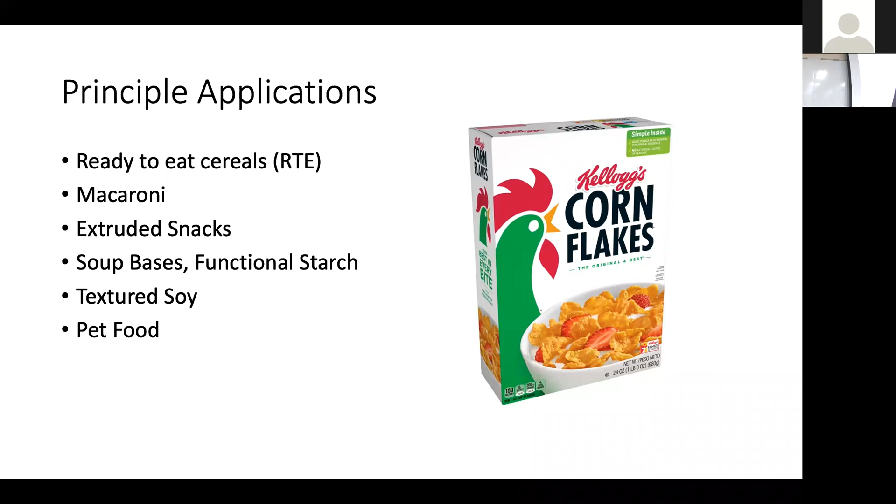So for ready-to-eat cereal products, you see your Rice Krispies, your Cheerio-type products, your cornflakes, your honeycombs - everything. Donut shaped ones with cinnamon and whatnot, shapes like X's, cereals like Lucky Charms where you have different shapes, just ball shaped ones, to flakes. So all of them are quite a bit of products that are in the marketplace.

Rehydratable noodles that include all kinds of shapes. Minute rice, that's also extruded. Was that not Orzo? Orzo too - Orzo or minute rice, I'm just talking about the rice lookalike, but it is cooked rice. That's why with minute rice, basically you add hot water and you have rice, right? For cooking rice normally, you cook it for 20 minutes - you soak it in water, and if you're going to pressure cook it, maybe 15 minutes. But this minute rice, you just pour hot water and you have the rice. So it's already extruded, shaped like a rice grain.

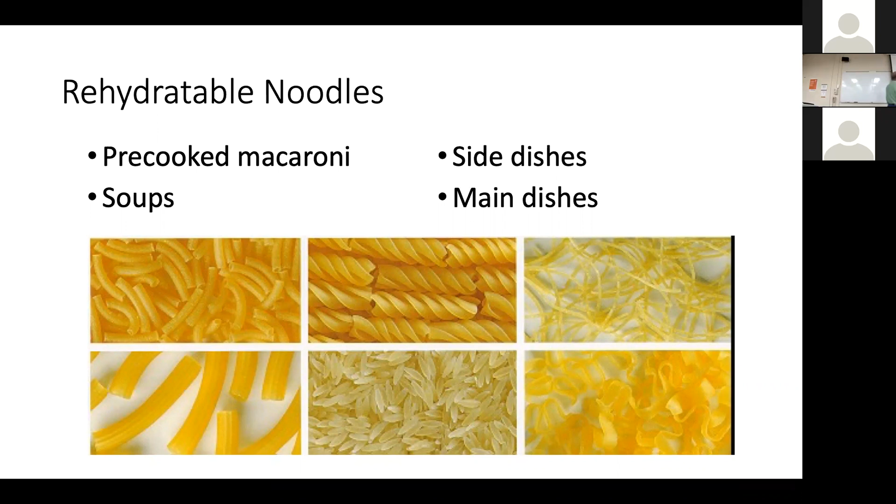These are all egg noodles, egg kind of proteiny and tortellini products, and you name it - all of those products.

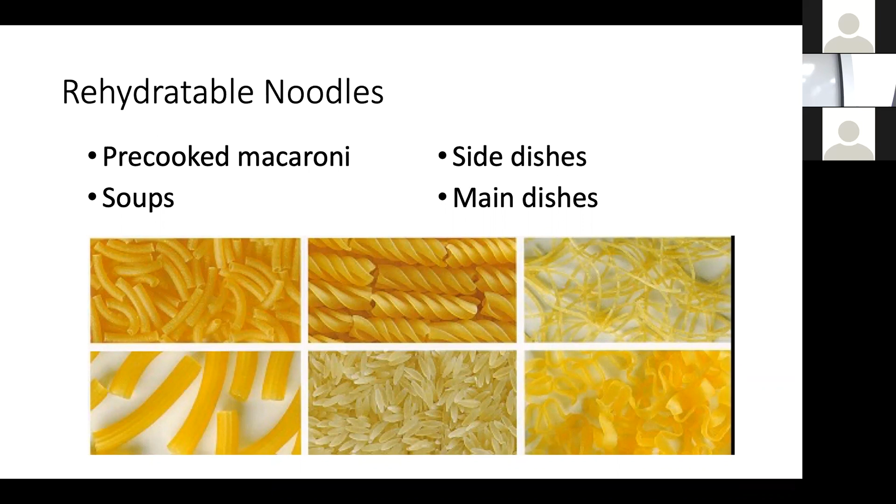And then extruded snacks - your Cheetos, puffed cheese products, or puffed potato products, onion ring type of products, you name it, cheese balls. So a whole range of extruded snacks.

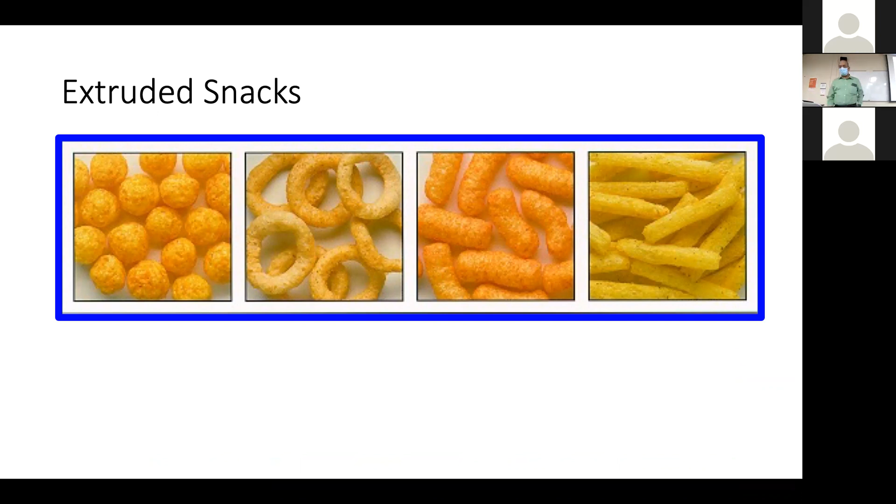Texturization, both starch and also protein. So restructuring starch can happen with texturizing under extrusion. Restructuring meat muscle - if you get some of the meat products that's no good to sell in the marketplace, but they are still really high protein, you can take them and create a restructured steak, a restructured lookalike of the other high value product. We can do that.

Restructuring vegetable proteins - we have a plant protein innovation center in our department. That's pretty much it, it all started a long time back. It's not new technology, but there is a renewed interest in plant protein based products now. I can tell you I worked on plant protein based product development back in 1994, which is like 25 years back. And I was not the first one to work on it, so somebody was even working before me, that's what I'm trying to tell you. So it's not really a new technology, but the technology gained momentum recently with Beyond Burger and Impossible Burger and those sorts of things. But the information has been there for a long time.

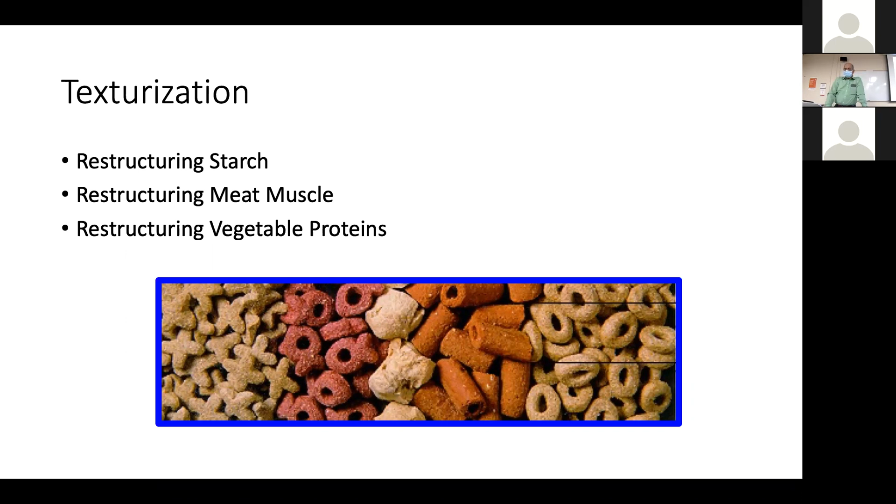Snack pellets - this is also there, again mostly different shapes that you can look at.

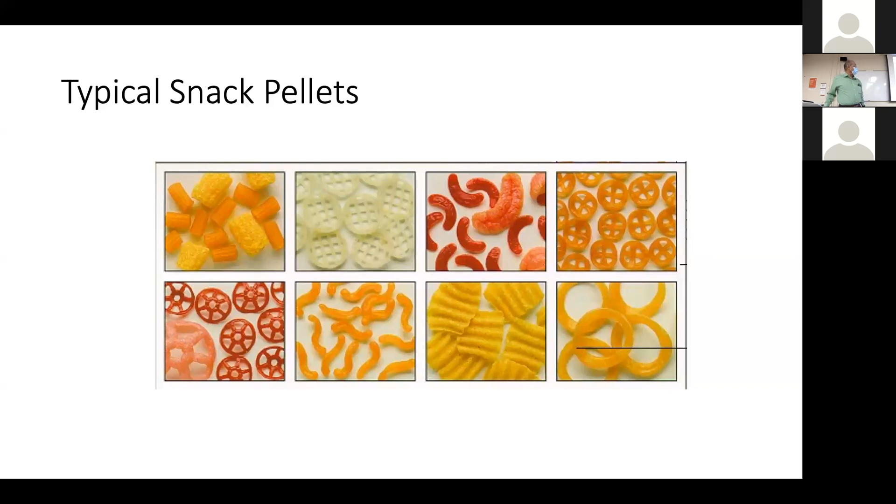Filled snacks. I used to teach back in Virginia, and when I asked how many of you guys eat Hot Pockets or Croissant Pockets, pretty much all graduate or undergraduate students say yes, because that's our staple food to live on, in a way. So those are all extruded.

Your cheese sticks are also extruded, using what's called a co-extrusion process, which means both materials come up in two different extruder barrels, and then they are put together at one point as they come out.

I've been to a processing facility where they make onion rings for Burger King. If you're cutting real onions, no two rings would be the same shape - there's an inner ring and an outer ring, different sizes. But Burger King onion rings are all exactly the same size and shape. How could that be? We don't question that, right? It's actually extruded - it's a formed product.

So you have an onion goo that's pumped through the center, and your breading batter comes on top, forming the product. It's a co-extruded product. Then it goes through a fryer for partial frying, then through freezing, and then to the marketplace, where the Burger King store refries it and gives it to you. So co-extrusion is another possibility.

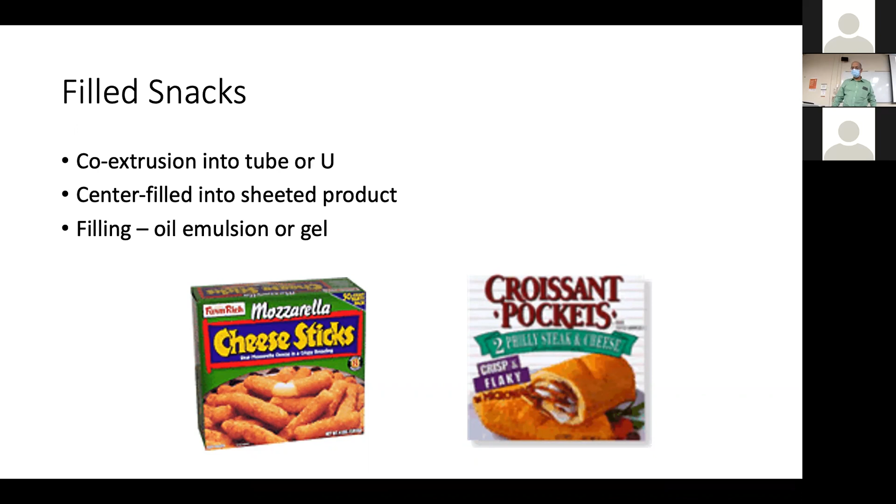Pet foods - this is the major market for extruded products, and you'll know why. All the pellets for pet foods and animal food.

How many of you have been to an African safari, where you see live animals outside and you're inside a cage instead of the animals? Have you been anywhere like that? No, that's sad. But there are a lot of places in the US where they take you in a cart, where you're inside the cart and animals roam freely around - places where animals can interact with humans.

They give you food to feed the animals, and most of these foods are extruded pellets. You can keep it in your hand and they'll take it out of your hand, and kids really love them. They'll charge you like $5 for a bucket, or maybe $15 for a bigger one, and you're willing to pay that, but the actual cost of the material is like 10 cents.

Basically all trash goes in, comes out as a nice pellet for the animals to eat, and the animals are well tamed to eat this. They always look for handouts from folks coming to see them - they'll come to you, like giraffes, zebras, you name it. Those animals are tamed to some extent, so they interact.

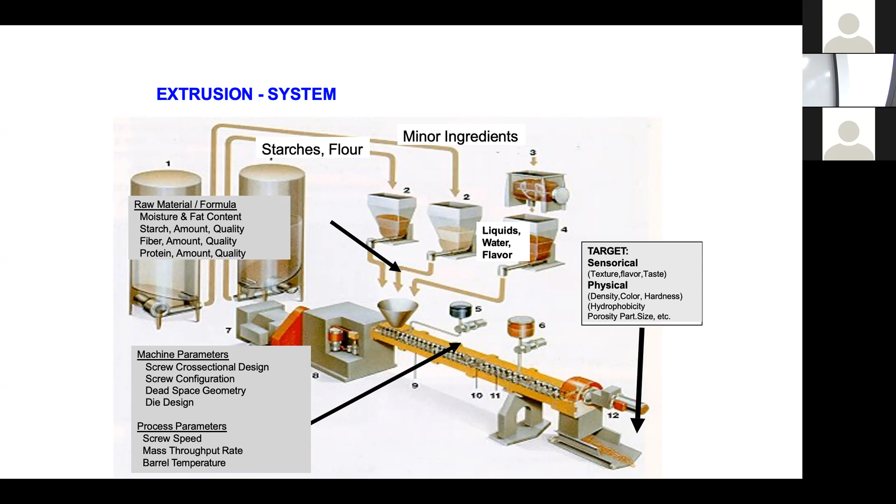So the types of extruders are single screw barrel or twin screw. Single screw is cheaper and mostly used for pet food kind of thing or feed grade extruders. Sometimes they also go into plastic manufacturing and chemical manufacturing technologies.

A decent single screw extruder could be about $20,000 to $50,000, something like that. But a twin screw extruder, a small one, maybe half the table size, the whole extruder part, like 5 foot maybe, a 19 millimeter diameter screw, is about $500,000.

I wanted to get one when I was in Virginia in 98, 99. That time it was $500,000, so it could be more than that now. I want to get an APV Baker 19 millimeter screw. It's almost like a toy for the industry, like a pilot plant scale, and that's $500,000. Pretty expensive.

When you go to industry like General Mills or Post, they will have like a 50 millimeter diameter, and then the screw would be from here to the end of the room, kind of. The whole extruder would be huge, and look at the price of that, because it's a unique process making those stainless steel screws. You've got to machine it very perfectly. The barrel has to be properly shaped and made. The machining is a very expensive process.

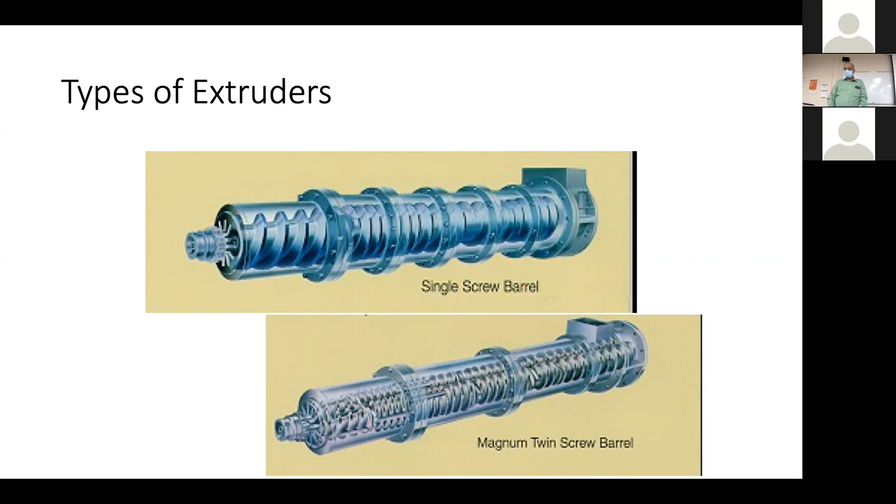Twin screw extrusion is very advantageous compared to single screw. That's why twin screw is very popular in the food industry, especially for human food kind of thing. It provides efficient conveying, and you can add a variety of ingredients.

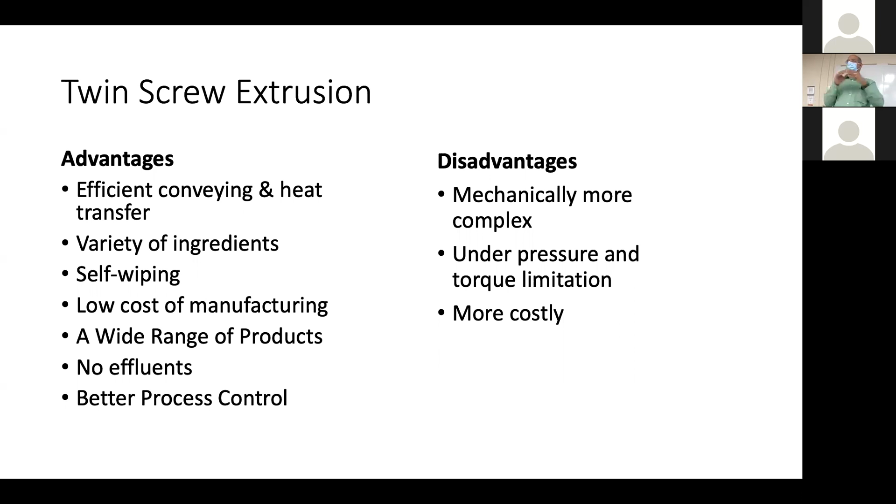It's called self-wiping, which means when I have 2 screws going in, one wipes over the other. So when you look at it, as the screws rotate, this screw will wipe this one and this screw will wipe this one. So you don't need to worry about anything clogging, any dead material in there. So there's no effluent in a sense, meaning whatever you put in will definitely come out. No wastage.

And there's a wide range of products possible. The manufacturing cost is minimal. Even though the capital cost of the machine is so expensive, once you start running the machine, the actual manufacturing cost is so cheap. So it pays off in the long run.

The problem with twin screw extrusion, even today, is that the extrusion technology is 50, 60 years old, maybe even more, and it's still not well understood. So you need real experts to make some of these design changes, which means if you are an extruder expert, you will make money like anything. You can rake in the money, you will be rich. And I know that there are only 10 or so extruder experts in the world.

And at least I know a couple of them, both in Minnesota. I'm just saying this is a complex machine, mechanically very complex. We will see more about it as we talk more down the line.

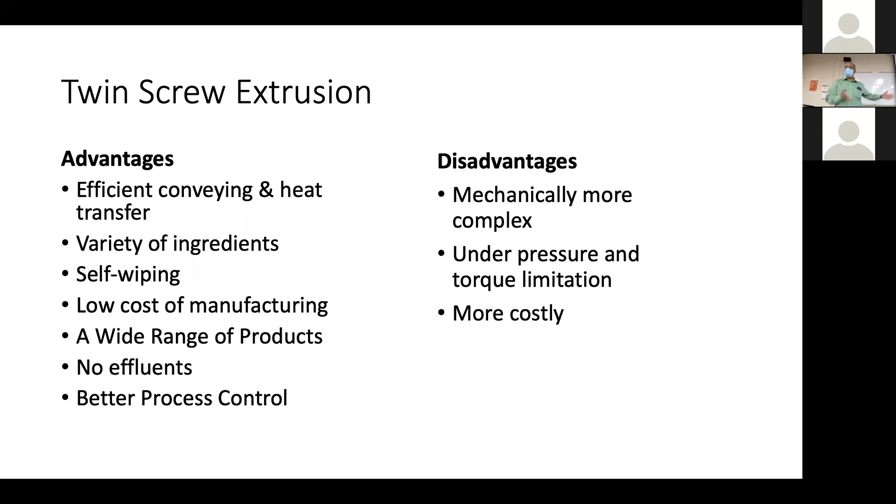The twin screw extruder, compared to single screw, has a limitation for pressure and torque, so you cannot run infinite torque or infinite pressure levels. A single screw can take a little more torque, you can put a bigger, more powerful motor to churn the thing. But its capital cost is very expensive. You already know, a small one, a toy, is $500,000 if you want to play.

So the definition for extrude is this: shaping of a material by forcing softened, plasticized material through a die by pressure. Simple. I'm going to create a shape of a desired form by forcing soft plasticized material through a die. That is what extrude means.

So the extruder could be something simple, what we call a forming extruder or cold extrusion. You're not heating it at all. You basically force the material through a die to create shapes. It's not a grinder, it doesn't grind at all, you just send the material through. We have extruders for making Indian snacks, like a handheld one where you put the dough, give pressure, and it comes through the hole to make shapes. That's a cold extruder, that's extrusion.

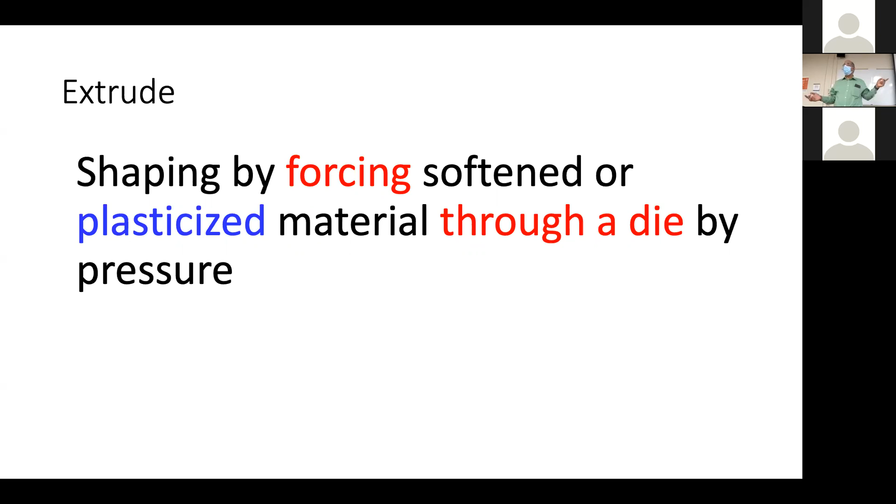Extrusion is when you get a soft plasticized material, then force it through a hole or die to create a shape. But in a cooking extruder, in addition to that, you are also cooking. The cooking extruder is the more advanced one.

The cooking process for extrusion is completely different. In addition to forming the material, in extrusion the water content is mostly not more than 25%, 10 to 25%, so you put the raw material as a paste. Compared to conventional cooking, it's almost 70 to 95% water.

The temperature with extruder will reach almost 200 degrees Celsius, just like that. Compared to conventional cooking, which takes a long time but doesn't go more than 120, that's your steam temperature. Unless you consider frying, you go for 170.

In extrusion, the actual cooking process is less than a minute, compared to traditional cooking which takes more than 30 minutes. So it's high temperature, short time—actually ultra high temperature, ultra short time, less than a minute.

Because of that, it doesn't have any of the side effects, and it has improved flavor, improved nutrition, and all that.

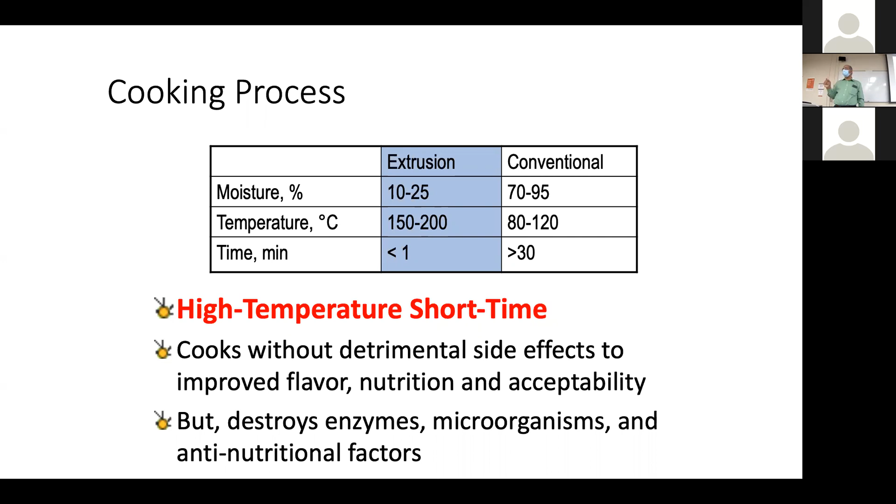And because of the heat, it can destroy enzymes, it can destroy microorganisms. It can also target anti-nutritional factors that are present, like toxins, in the food.

When we look at the extrusion process, we have a preconditioner. We already showed you the minor ingredients kind of things, moisturizing. You can add heat with steam. You mostly mix with low shear, trying to get a uniform material to go through your extruder.

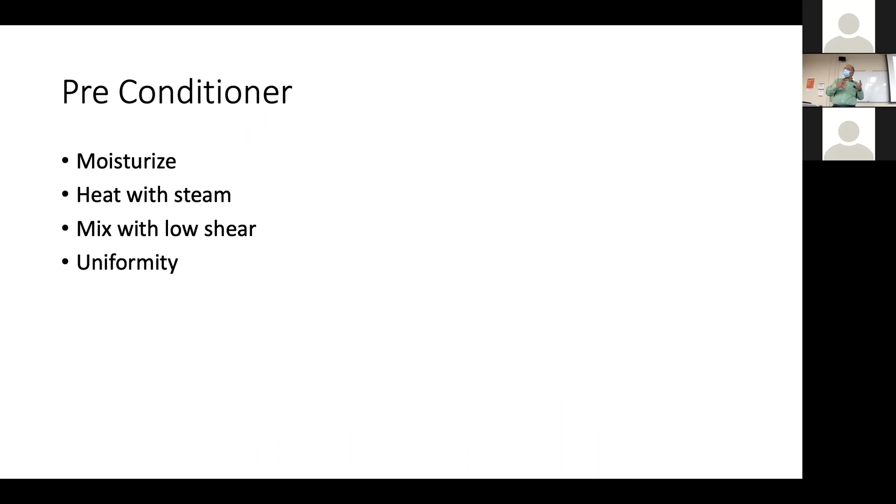Then you have the screw, the major part of your extruder, where heat is generated by viscous dissipation. That's the fundamental principle for the extruder—viscous dissipation. You can also do heat transfer, remember we talked about barrel heating or barrel cooling, and steam injection. You can add steam along the line; they inject steam inside the barrel, then vent the steam. You can add flavors into the extruder. At the end of the screw, you have the restriction—that's your die.

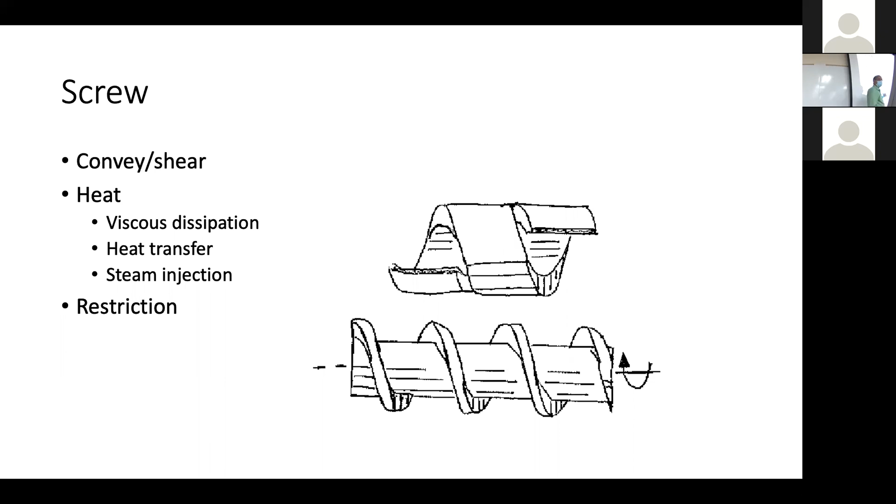So in a single screw extruder, when you look at it, this portion—the pitch is open, and the gap between the screw and the barrel is also open-ended. This is called the feeding zone. In the feeding zone, most of the time it will be a starved screw, meaning it will not be completely filled. You can keep adding more.

But as that goes to the kneading zone, you can automatically see the pitch has reduced, and the gap between the barrel wall and the screw is also narrower. So you start to see kneading—kneading is almost like massaging.

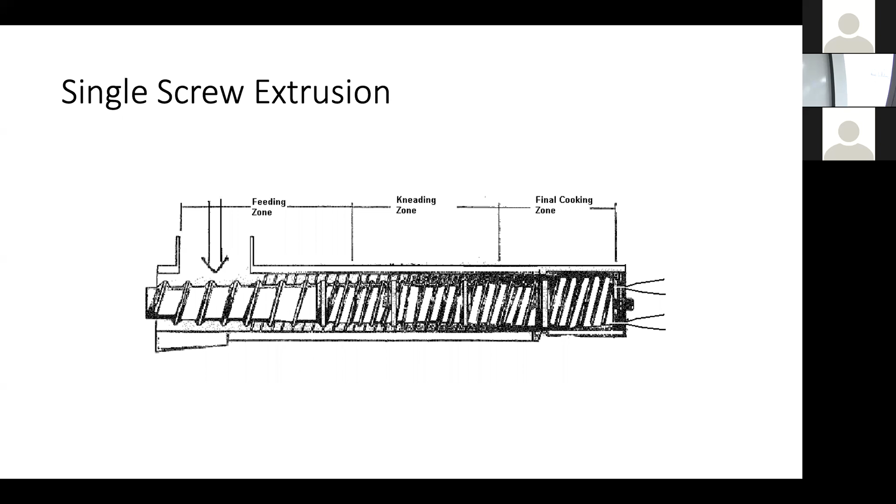Then this is the final cooking zone, where the pitch narrows even more, and the gap is practically nothing, very minimal. So in that case, the material gets cooked. If you talk about a single barrel, single screw extruder, the cooking happens only here. So how much residence time is the product going to have in this portion? Less than a minute, like a few seconds if you want to put it that way. The actual cooking process happens there.

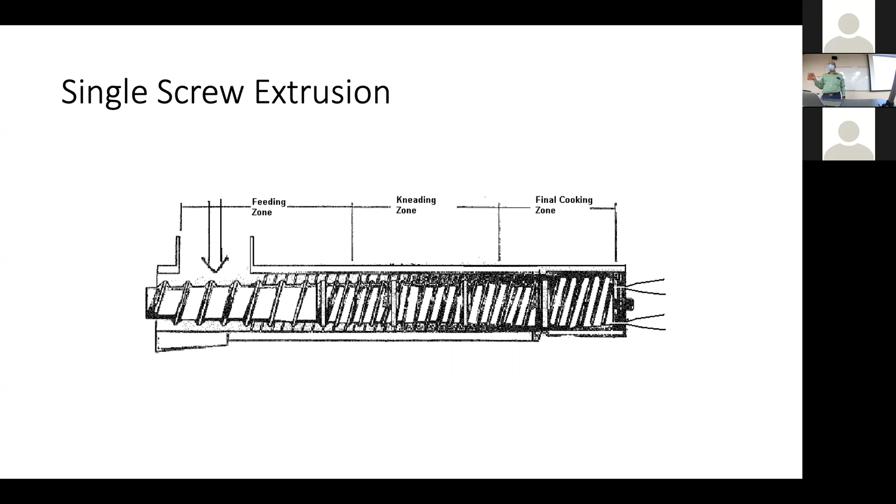So flow in the screw, this is a fundamental: laminar flow. Please remember that. Laminar flow means there is no turbulence. Flow caused due to shear.

The flow happens because the screw is moving, and then particles move in parallel paths. So they don't mix. No radial mixing. It's like going in a highway, everybody going in their own lane. You keep your speed, don't change your lane. The faster lane guy doesn't come to the slower lane, and the slower lane guy doesn't speed up to the faster lane. None of that happens. Everybody stays in their lane going at their own speed.

It's like German highways, right? Zoom, zoom, zoom, keep going. You go in your lane, at your speed. So the fastest lane, even within the multiple lanes, is the inner lane, right? The cars there go really fast. The lane close to the exit, they go slow. So that's what you have. That's the laminar profile, right?

So the laminar profile will look like this. This is the fast lane, guys, and this is the slow one, close to the exit. Something like that. So this is laminar flow, no radial mixing.

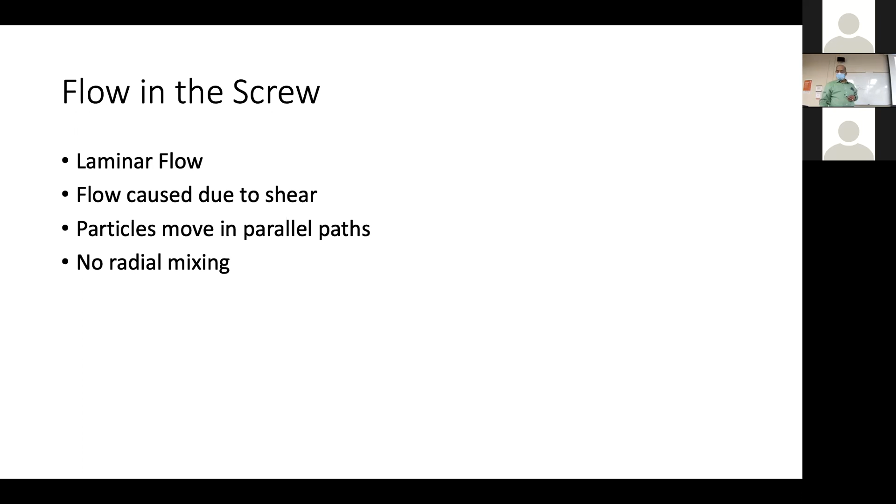The effects of shear: if I increase the shear, that means I increase the mechanical damage in the food, and that will reduce particle size. It's like grinding. When the material is going faster than the other one, they rub against each other, and they break things down. So you get a reduced particle size by increasing the shear.

You also get increased solubility, because the broken down material will be ready to dissolve rather than lump. And then softer texture and orientation happens. That's the beauty of an extruder: if I'm feeding in proteins, and the proteins can bind to themselves, I can really create the striations that you see in meat. So that's why you can create fake meat with an extruder when using plant protein.

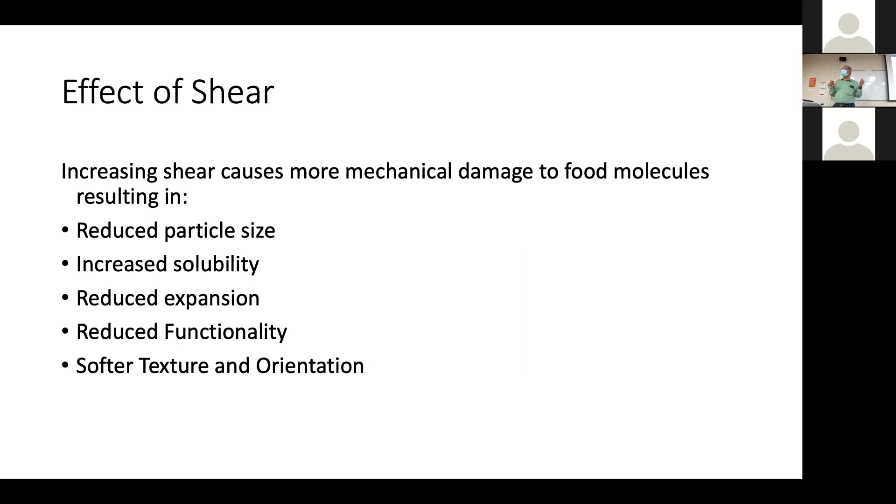So shear is a good thing for me. How do I increase the shear? Either I reduce the moisture content of my material, go for low moisture, so the material isn't ready to flow and I create that kind of friction. Or use a higher screw speed, run the screw faster. There's a limit, I cannot do it infinitely, but increasing the screw speed increases shear and increases the work.

Increase the compression ratio. Compression ratio means the diameter of the feed screw compared to the diameter of the cook portion. You remember in a single screw we talked about something like this, this is a screw, it will be the same with a bigger pitch. This is the screw. Get the idea, right? So this is the diameter, and this is the other diameter. So the compression ratio is D feed over D cook.

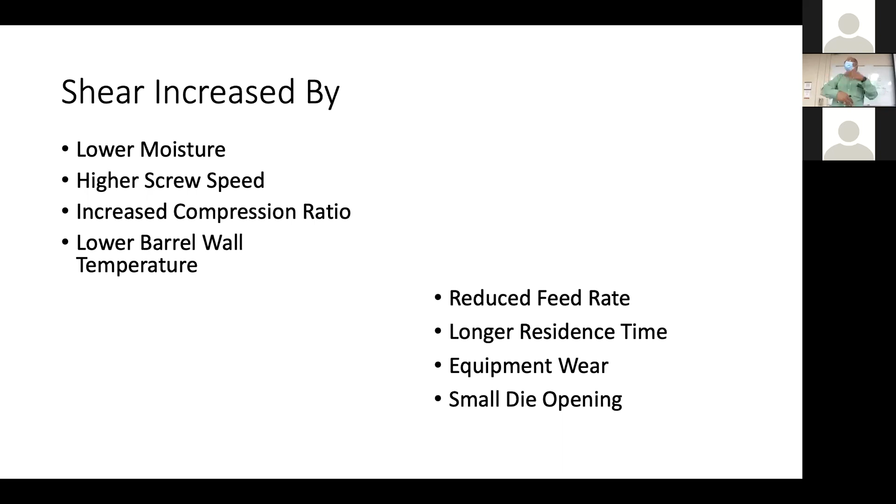And then a small die opening — you put a restriction at the end. If you don't get enough pressure to go through the die hole, the material is going to be churned inside your screw the whole while, so you're increasing shear. So the restriction techniques include the die hole, or reverse pitch screws, which means if I have a screw going in one direction, you reverse the pitch completely. So if this screw is going in this direction, a reverse pitch screw will be like this.

Okay, so as the material is flowing, as the rotation is happening, this is also rotating in the same way. So this will create a flow in this direction. The flow here has to be maximum to cause a flow to go around here.

So you are increasing pressure at this point. The pressure profile will be different. Also, cut flight screws, which means the flight will not be continuous - you create cracks or cuts in the flights. Or a dam - a dam will not let material move further. So you create dam elements. I have pictures, you can see all of them.

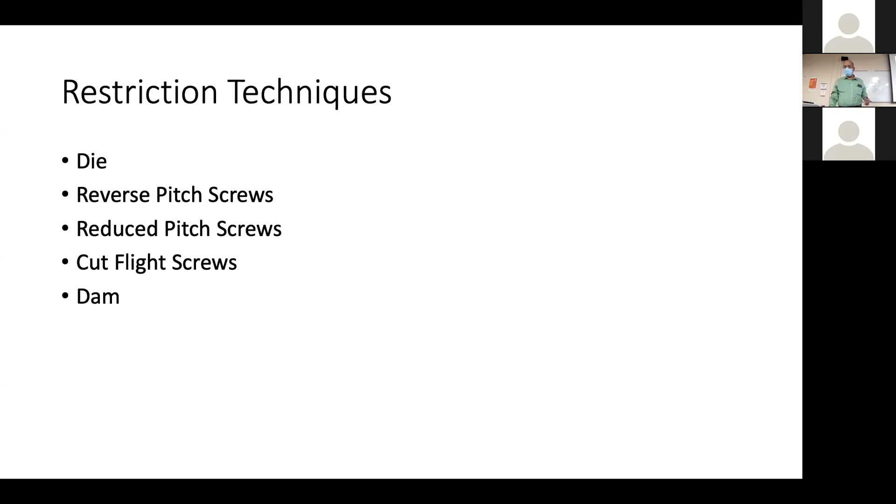So in a sense, when you are talking about a twin screw, they will have an inter-meshing screw profile. This has to match - I cannot put a different screw here, it needs the same pitch so that they can go around together. So the screw elements, that's why in a twin screw it's mechanically complex, because you can actually make arrangements - I'll put like 2 or 3 feed screws, then change it and maybe put a reverse screw, then put some cooking screw, maybe add some kneading elements like that. So I build my own screw profile.

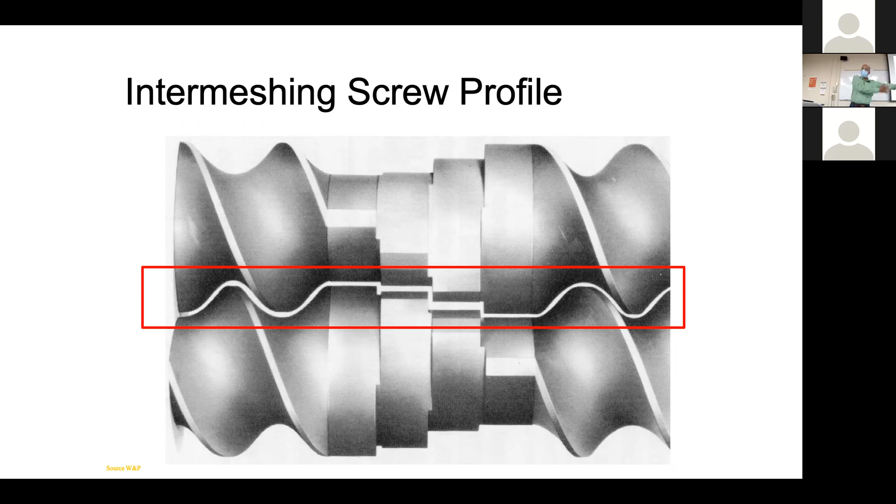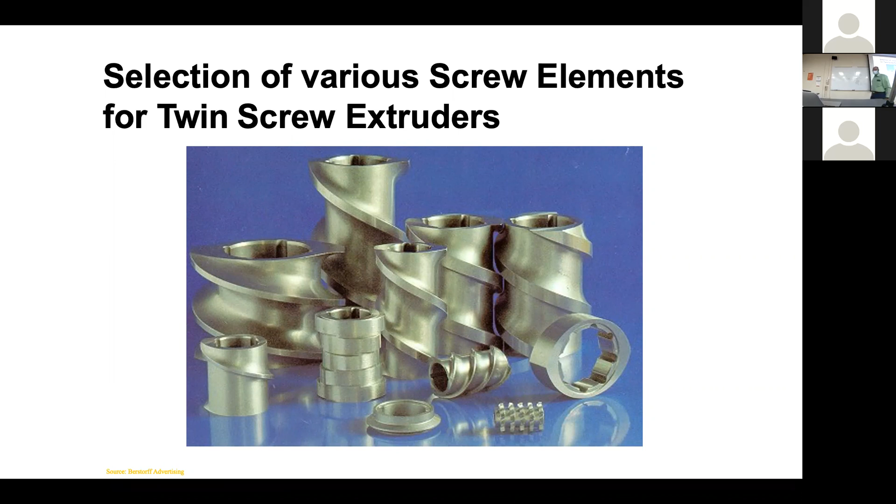So large pitch conveying elements - the major function is volumetric displacement. We all know that larger pitch means it's mostly used for feed screw, so feed intake and also downstream feeding of solids. Or sometimes when you're adding flavor into your extrusion process, on injection ports, you need a bigger screw pitch because you need to create a starved condition - you don't want the material to come out, rather whatever you're putting in should go in. Same way, after pressure buildup zones, you want everything to come in.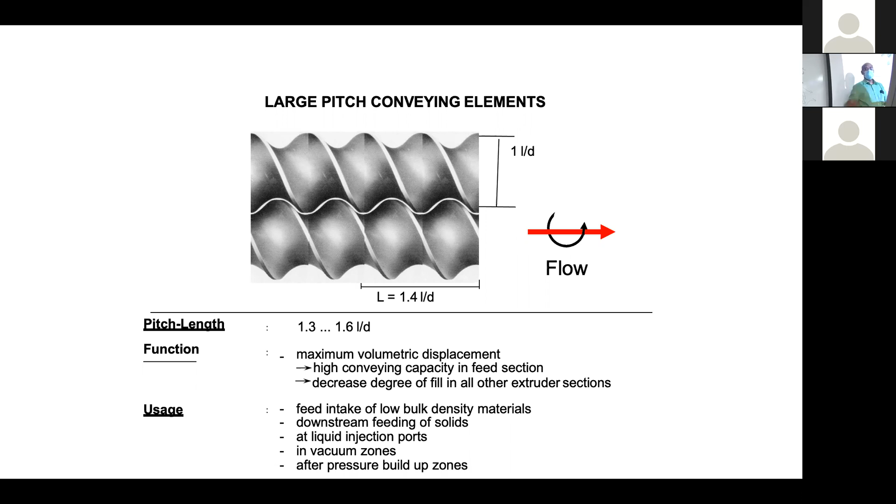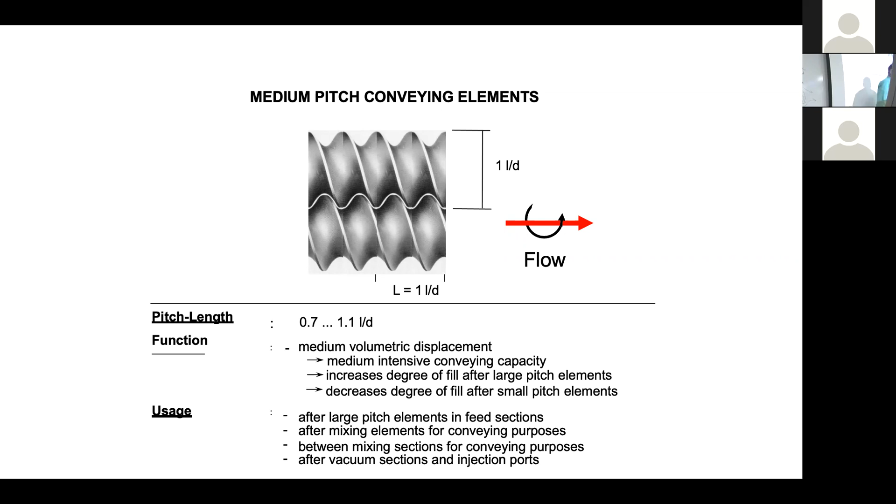Medium pitch conveying elements - these conveying elements are mostly used for mixing in the kneading portion, or between mixing and conveying purposes, so it's somewhere in between. Then small pitch elements, basically used in the cooking section - it increases the degree of fill while conveying, and small pitch elements are used before mixing sections, and also mostly used in the last barrel section for pressure buildup purposes. I told you, this is for cooking.

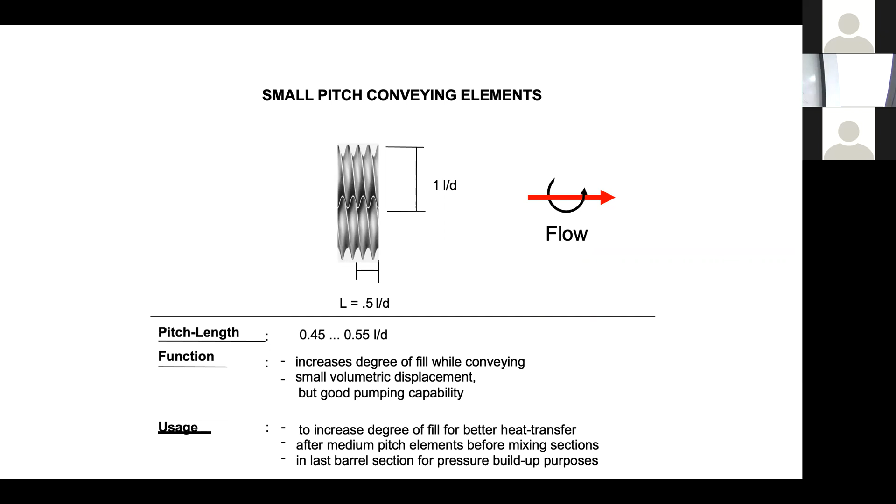The narrow staggered kneading discs, obviously, tell you kneading. Kneading is like creating radial mixing, as if you are trying to make dough - knead the dough, right? So it's like 45-degree forward, you look at that, those things are all disrupted, so it gives you distributive mixing. I already told you, it's not laminar flow anymore. It also gives you low shear input, so mostly material just stays in the same location until it gets mixed. If you have high shear, it will be moving forward - I don't want it to move forward, I want it to just stay there and get mixed nicely, get kneaded completely. Also, very limited pressure buildup - it's not going to build you pressure.

Mostly they put a kneading element before a reverse pitch element, for high pressure peaks and high shear input. So you put a kneading element before a reverse element. The reverse element is going to keep the material there in your kneading section until the kneading gets nicely done - you build enough pressure for the flow to go. So you really create a mixing section - positive mixing happens there.

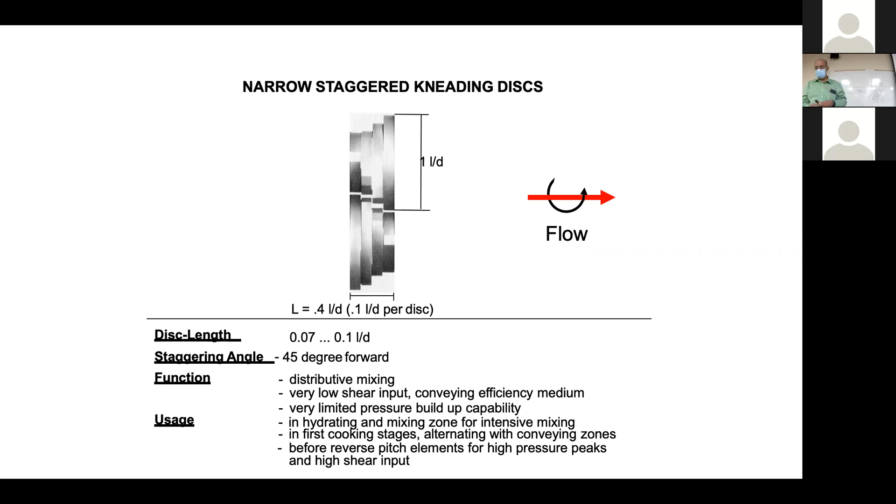Reverse pitch conveying elements - I told you, when you look at it, this pitch is completely reversed, and it increases degree of fill in the previous section, because you need to completely fill and then get pressure to overflow the reverse, otherwise the flow will not happen, right? Again, this creates a high pressure zone.

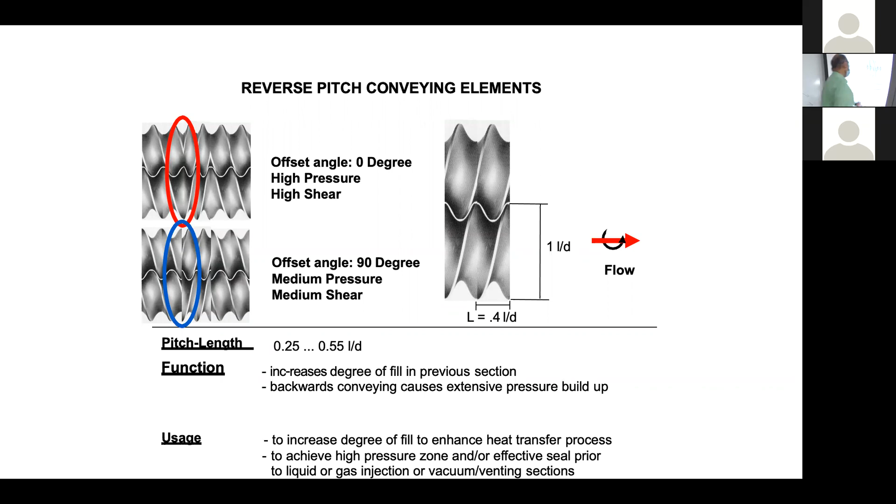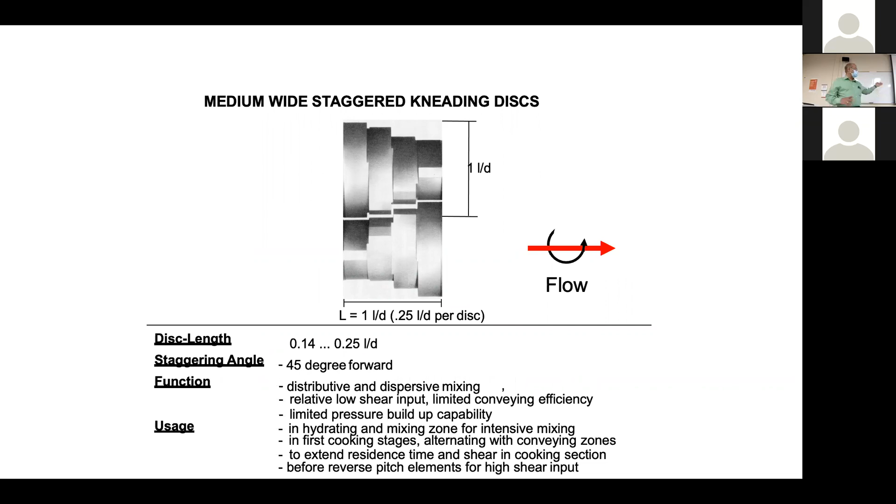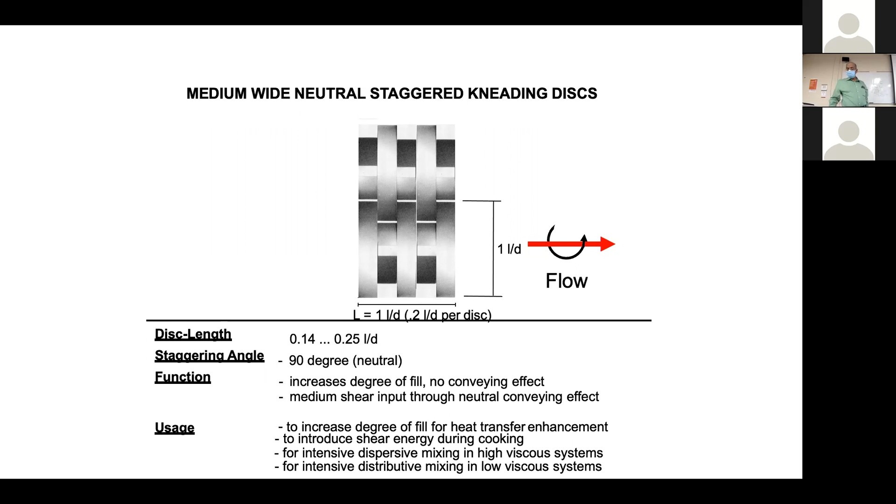Then this is again a medium wide staggered kneading disc, pretty similar to what we talked about previously with kneading discs. And then neutral staggered kneading discs - again, you can look at the flow direction. And narrow staggered, the left-handed kneading disc is something special, kind of screw element.

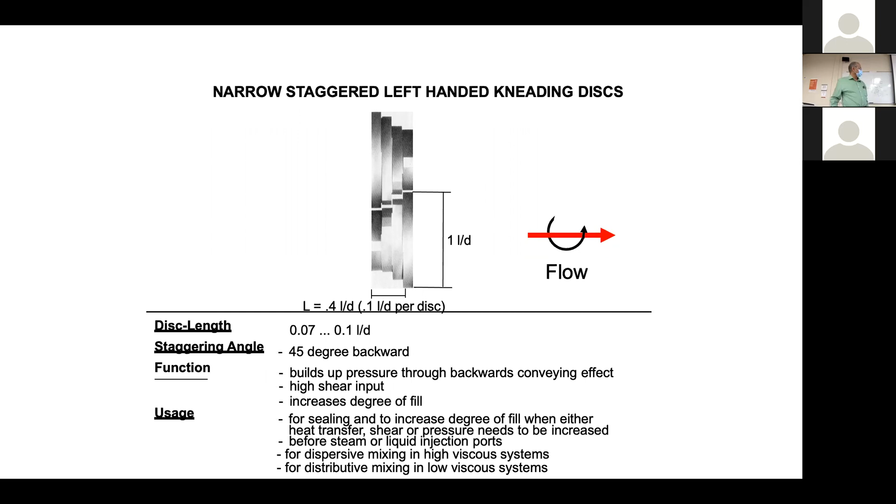So the other thing is we talked about the compression ratio, if you remember, the DA to DI ratio - outside diameter to inside diameter. If you have a higher one, automatically that's your feed screw, right? This diameter to that diameter being bigger means you have a deeper well for your transfer. So that's 2.25, compared to almost 1 or 1.25 in this other case. So as you reduce the ratio, your shear will increase, or your volume will increase on the other hand - so volume will decrease as shear increases: low volume to high volume, low shear to high shear. Okay, got that? Simple.

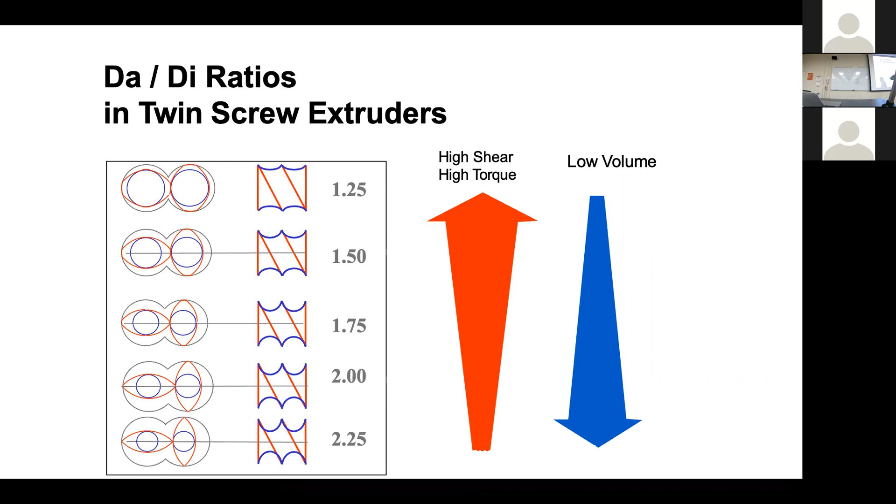And then you can look at it like this is die holes. So this one, you will look at the die hole, it's almost like a slit that you're making products like this, like lasagna, pasta, if you want to put it that way. And then these are the holes you're trying to make balls.

Because of the cornstarch expanding, even a tiny hole creates a shape that big. Or it could be pellets, tiny pellets, the same hole. So the same thing can make these two products. Think of it that way. By changing the product characteristics that goes in, maybe depending upon amylose and amylopectin, or what starch you are sending in, or how much moisture that it goes in with, or what other ingredients go along with it. Maybe you get a pellet, or you may get a ball from the same die hole.

Same way, like this is the same hole. You're making a product like this, like your Sunchip crisp kind of thing. And then this is an annular hole where you have an annular pin in the middle. So if you're creating your Cheerios like product or your onion ring like products, same thing, same shape. And this one, you create a variety of shapes. And then this is again a die with a special shape to come out. Okay, so again, variety of ways and means we can make.

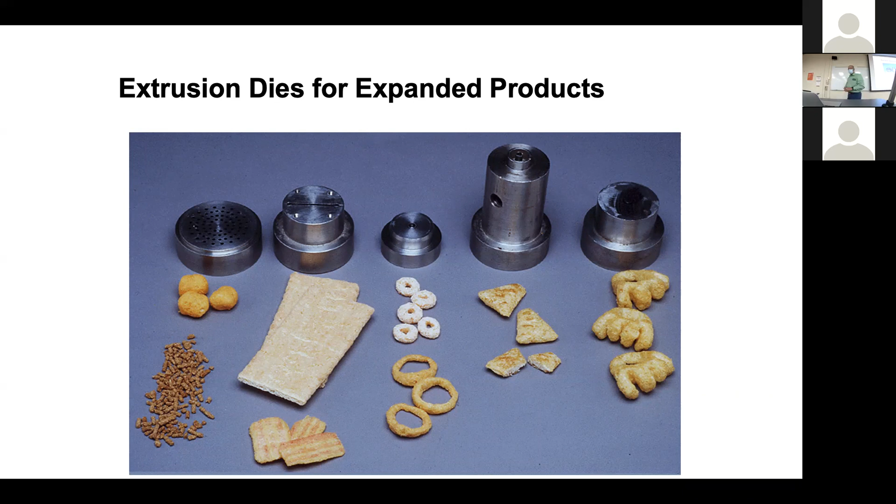So major ingredients include ground cereal grains, starch. Starch is the one that styrofoam is your packaging material, which we create with starch, vegetable protein meal, and practically anything. Anything practically, I'll tell you the story.

In Georgia, when I was there, southern Georgia, it's almost like close to Florida, there was a poultry farm. And then that particular year, they had some major avian flu virus attacking the chicken. He lost almost like 60% of his lot, like chicken they got to be culled. He cannot sell it in the marketplace. It's all this virus thing. So he needs to do something about it. One thing he said was, I'll not do anything to the chicken. I'll just take them with the feather and all.

I will put them in this extruder barrel, put it on one side, add something else also like flour and other things. And then he created pellets. And then that pellets were used for his African safari. He had a safari too. So the kids will love feeding the animals with that pellets. And then he didn't have to waste the chicken. So he didn't even prepare the chicken like bone and all. Like he said, put the whole damn thing.

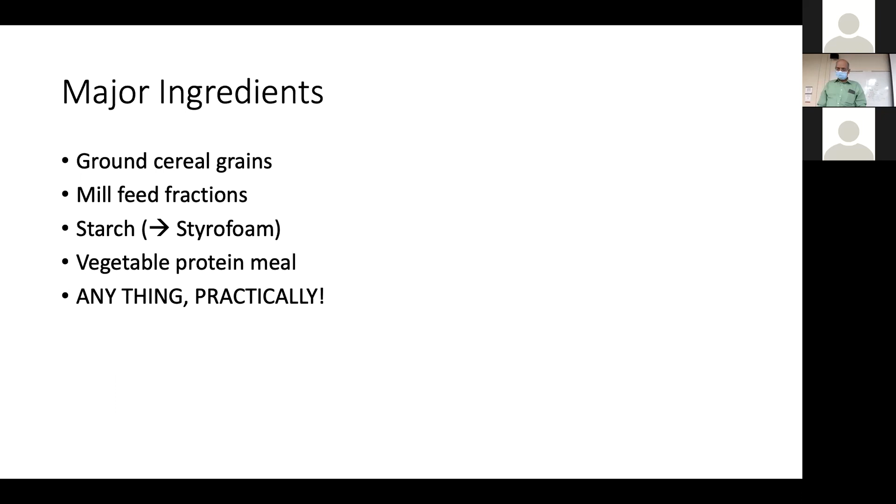Okay, so there's another farmer in Florida. The guy had a similar problem at the same time, but he didn't go for an extruder. He just went and got alligators and then fed this dead chicken to the alligators. And then after that, he's done with the alligators. He just killed the alligators, got the skin out of it, and made purses and bags and whatnot. That's another way of taking care of the problem. So either you go through a feed extruder or get some free alligators. And I think Florida, maybe alligators is pretty common, right? Yeah, so alligators eat everything practically, right? Anything practically.

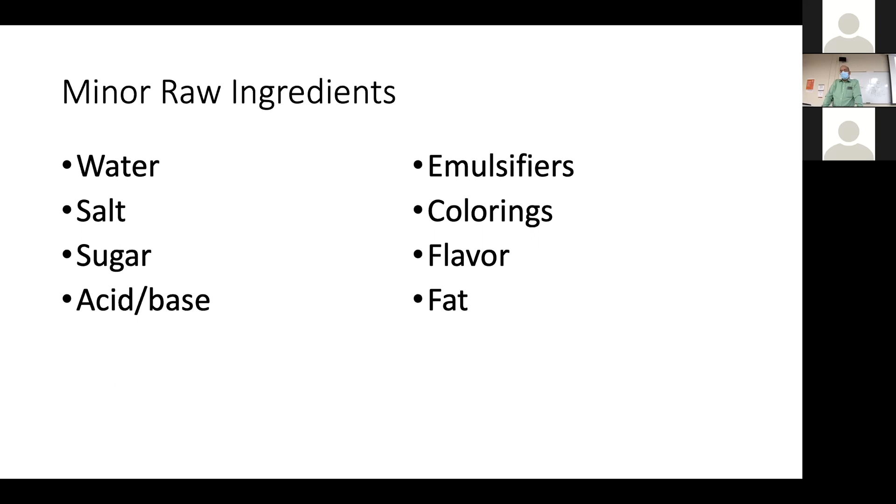Minor raw ingredients include water, salt, sugar, emulsifiers, colorings, flavor, you name it, fat.